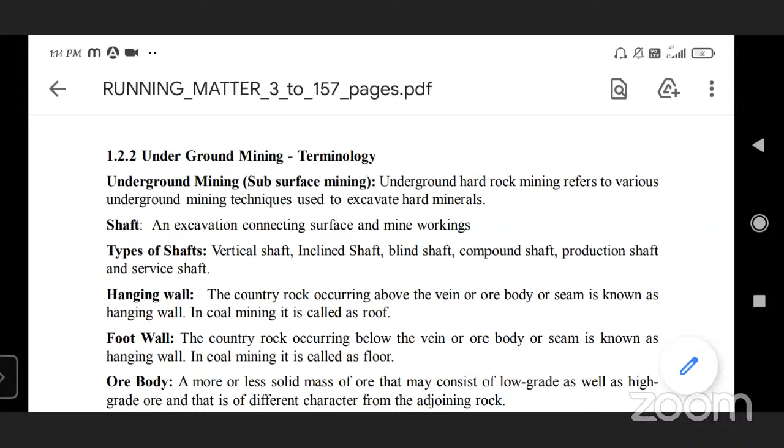Foot wall is vice versa to the hanging wall. The country rock occurring below the vein or ore body or seam is known as foot wall, whereas in coal mining it is called floor. So these are the terms used in coal mines - roof and floor.

The country rock which is above the ore body in coal seams is called the roof. If it is below the ore body, you call it the floor.

An ore body is a more or less solid mass of ore that may consist of low grade as well as high grade material, and is of different character from the adjoining rock. That is called an ore body.

A lode is a mineralized zone.

A mineral deposit is a deposit which is an accumulation of a mineral, usually economic minerals, in an unusually high concentration, a large scale amount of material. When such accumulation takes place, we call it a mineral deposit.

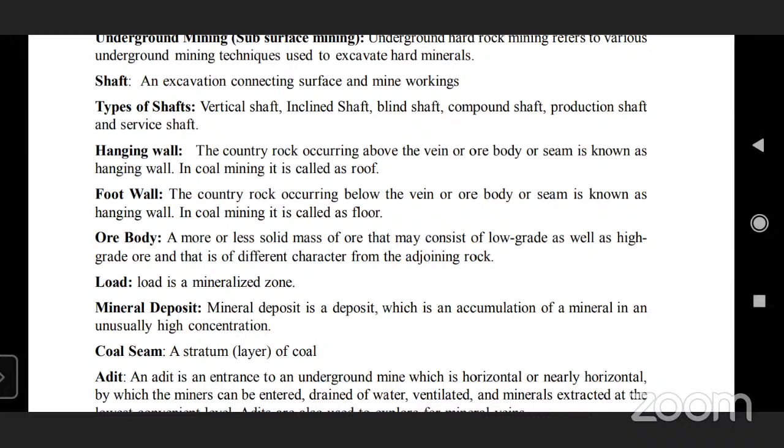An adit is an entrance to an underground mine, which is horizontal or nearly horizontal, by which miners can enter, water can be drained, ventilation provided, and minerals extracted at the lowest convenient level. Adits are also used to explore for mineral veins.

A tunnel is an underground passageway, completely enclosed except for openings for entrance and exit, commonly at each end. Both ends are open to the surface.

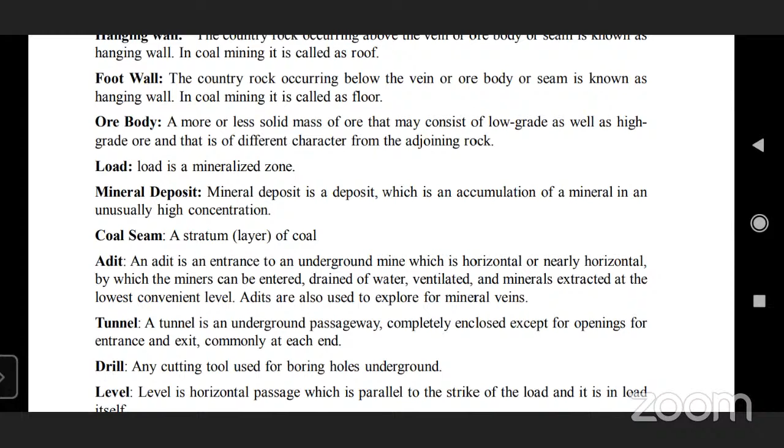A drill is any cutting tool used for boring holes underground. A level is a horizontal passage which is parallel to the strike. There are also foot wall drive, hanging wall drive, stone drift, raise, drive, drift, gallery and winze - all different terminology.

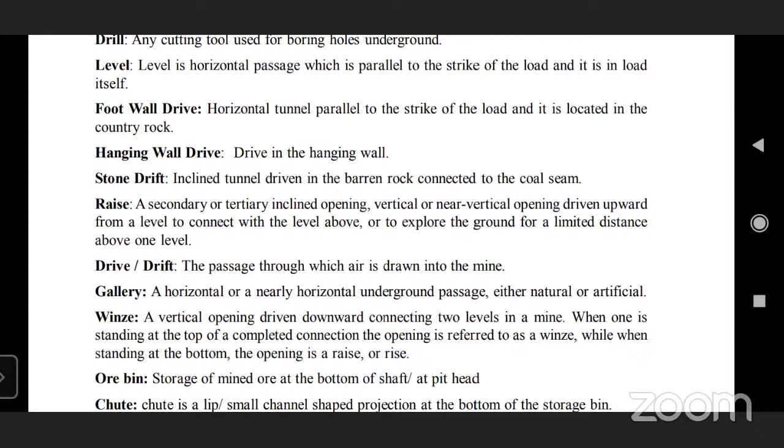A raise is a secondary or tertiary inclined opening. A gallery is a horizontal or nearly horizontal underground passage, either natural or artificial.

An ore bin is a store of mined ore at the bottom of a shaft or pit head.

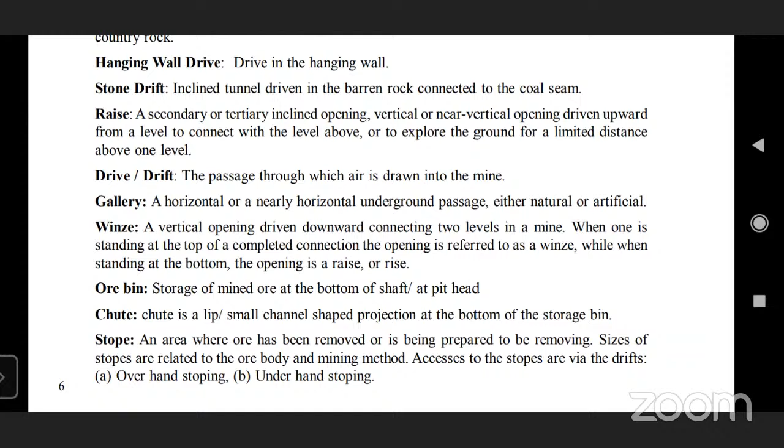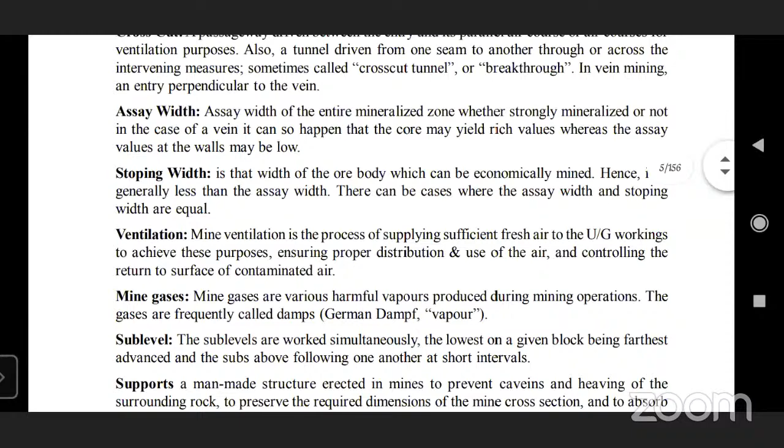A chute is a lip or small channel shaped projection at the bottom of the storage bin. Other terms include cross cut, assay width, stoping width, ventilation, mine gases, sub level and supports - all different terminology used in underground mines.

So these terms - what is a shaft? A shaft is a connection. These are different questions you can see by following the above concepts.

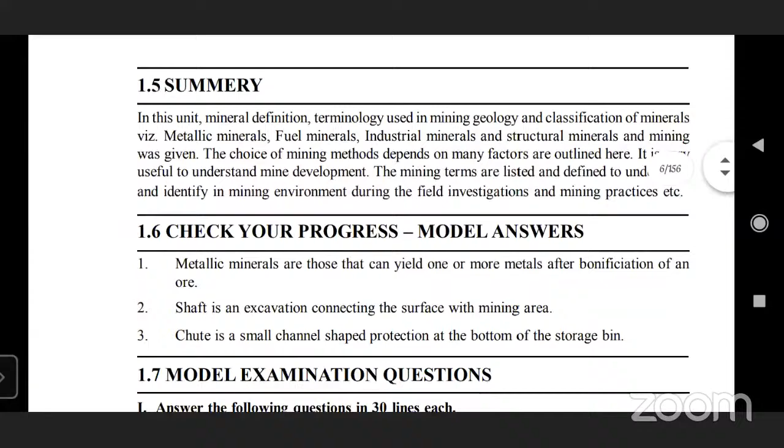Coming to the second part, second unit: methods of breaking the rocks. In this topic we would like to learn the major topics of methods of breaking rocks in the introduction.

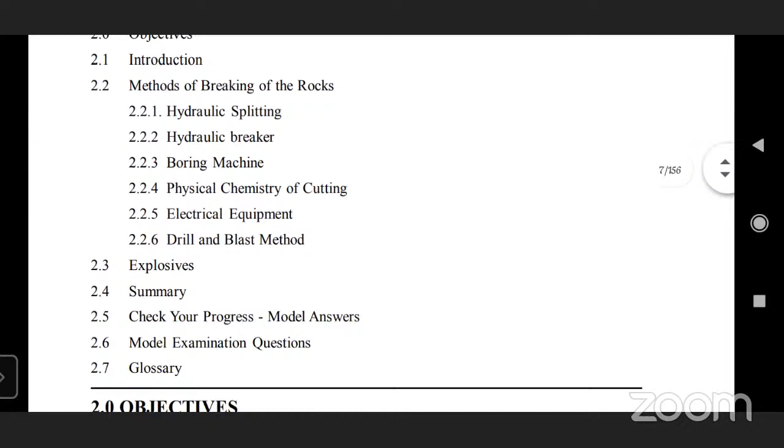These methods of breaking rocks mostly include hydraulic splitting, hydraulic breaker, boring machine, physical chemistry of cutting, electrical equipment, drill and blast methods, and explosives. These are the things we are going to complete in methods of breaking rocks - what type of methods are used to break rocks.

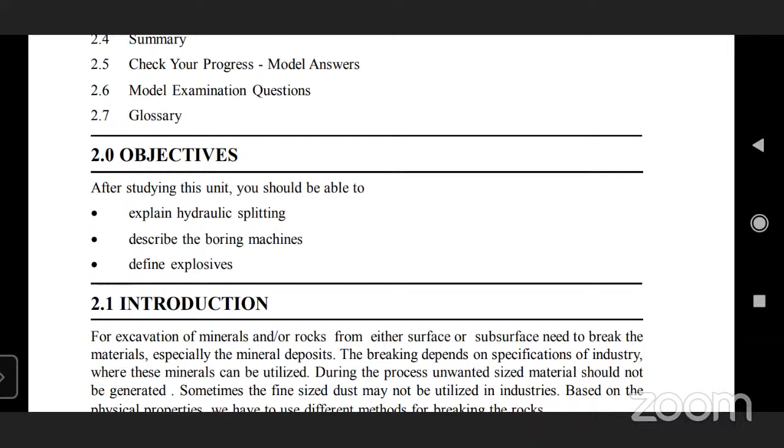The major objective after studying this unit: you should be able to explain hydraulic splitting, describe boring machines, and define explosives.

You can able to answer such type of questions.

Coming to the introduction of methods of breaking rocks. For excavation of minerals and rocks from either surface or subsurface mines, we need to break the materials, especially the mineral deposits. The breaking depends upon specifications of the industry where these minerals can be utilized, and unwanted sized materials should not be generated.

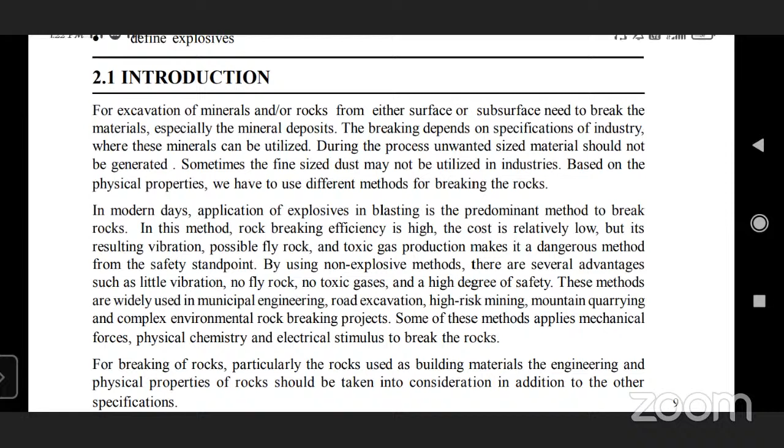Sometimes fine sized dust may not be utilized in industries based on the physical properties, so we have to use different methods for breaking the rocks. There are certain specifications for breaking depending on the industry where these minerals or rocks can be utilized - what minerals, where they can be utilized, the type of industry and what specifications you are going to manufacture - all these are essential before you break down the materials.

Mostly in modern days, application of explosives in blasting is a predominant method to break rocks using modern mining technology. Explosive means blasting apart. So application of explosives in blasting is the most predominant method to break the rocks.

In this method, rock breaking efficiency is high and the cost is relatively low, but its resulting vibration, possible fly rock, and toxic gas production makes it a dangerous method from the safety standpoint.

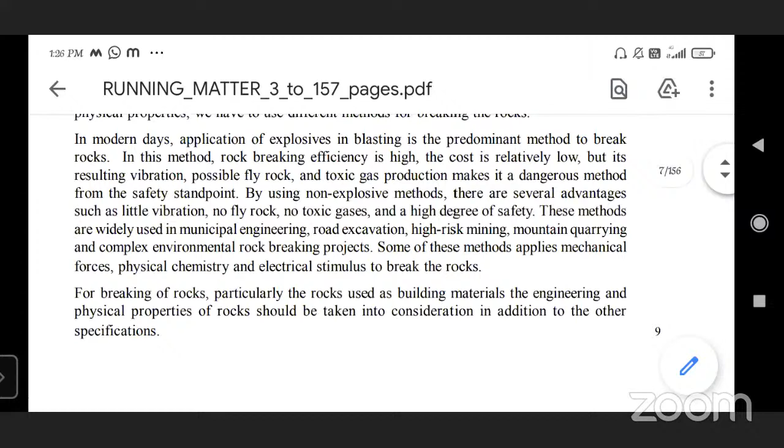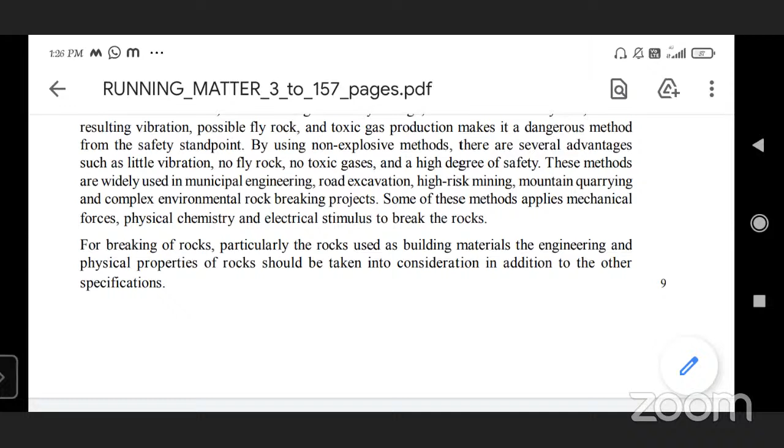For breaking of rocks, particularly in the case of rocks used as building materials, the engineering and physical properties of rocks should be taken into consideration in addition to the other specifications.

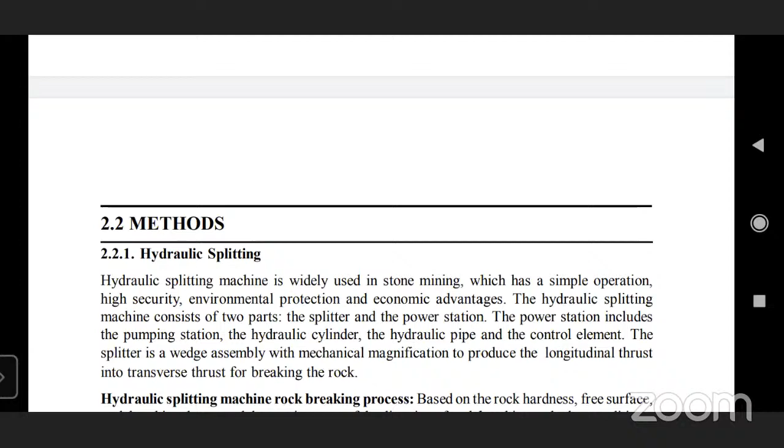So what are the methods of breaking? There are several types of methods for breaking rocks. The first one is hydraulic splitting. The hydraulic splitting machine is widely used in stone mining, which has simple operation, high security, environmental protection, and economic advantages.

The hydraulic machine has majorly two parts: the splitter and the power station. The power station includes the pumping station, the hydraulic cylinder, the hydraulic pipe, and the control elements.

The splitter is a wedge assembly with mechanical magnification to produce longitudinal thrust into transverse thrust for breaking the rock. This is hydraulic splitting, it has a machine, and it is widely used in stone mining mostly. The hydraulic splitting machine rock breaking process is based on the rock hardness, free surface, breaking degree, and the requirements of the direction of rock breaking and other conditions.

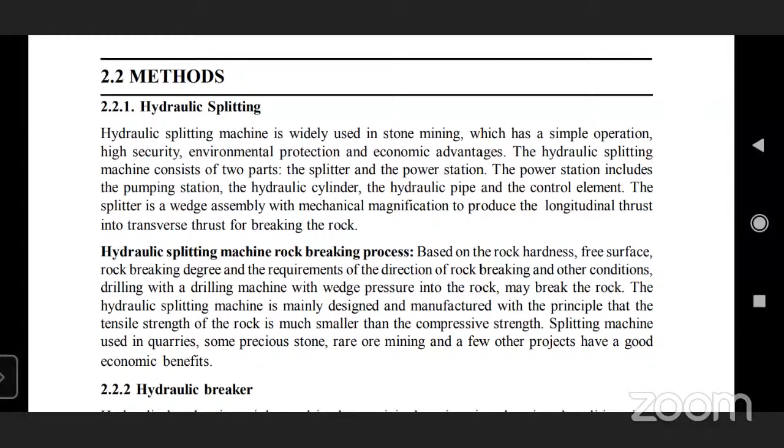There are several types of hydraulic splitting machines, mainly designed and manufactured with the principle that the tensile strength of the rock is much smaller than the compressive strength.

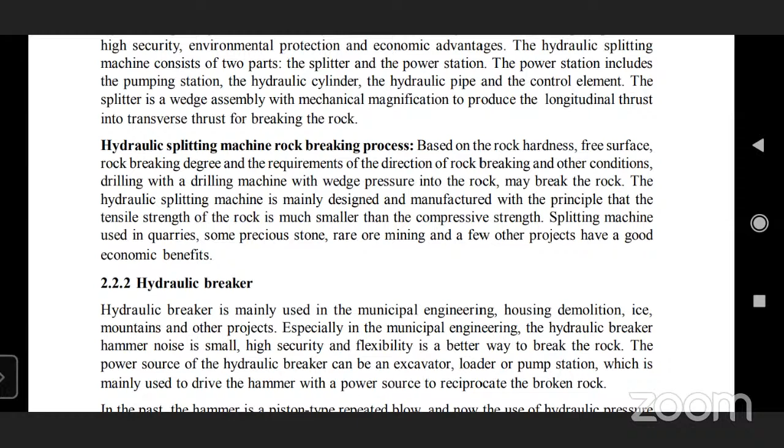A splitting machine used in quarries, some precious stones, rare ore mining, and a few other projects, they are seen very clearly. There are several methods which we are going to see very clearly, whatever the hydraulic splitting machines which are very clearly able to break the rocks by using different types of rock breaking methods.

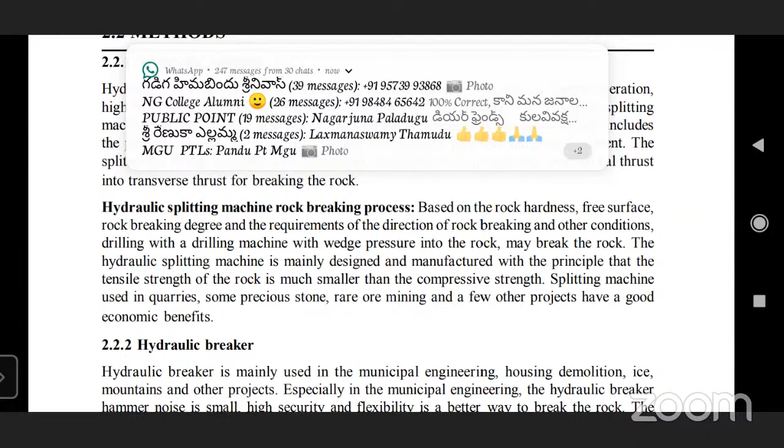These hydraulic machines, mostly using the hydraulic splitting method, work based on the tensile strength of rock being much smaller than the compressive strength. The splitting machine used in quarries, some precious stones, rare ore mining, and a few other projects have good economic benefits. Then, the hydraulic breaker.

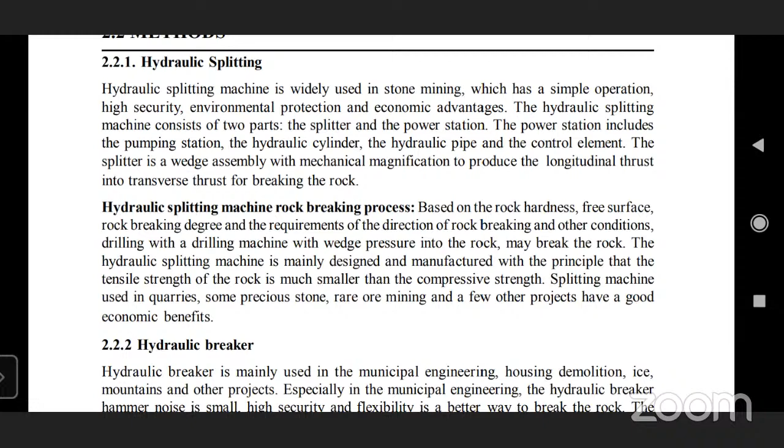The hydraulic breaker is mainly used in municipal engineering and housing demolition, meaning to spoil the constructed house. Most municipal engineering works mostly use this hydraulic breaker to demolish houses.

When householders occupy the road and start construction, the municipality engineers will come and check the distances. If they have occupied the road, they are going to demolish it using the hydraulic breaker with a technician. This is municipal engineering use of the hydraulic breaker - the hammer noise is small, with high security and flexibility, making it a better way to break rock.

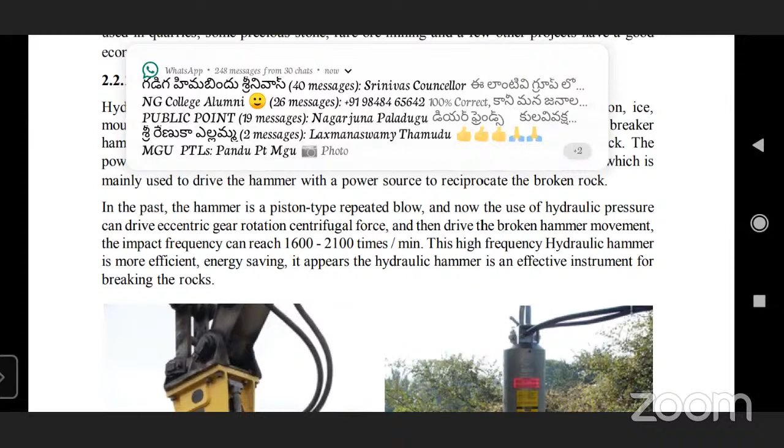The power source of the hydraulic breaker can be an excavator, loader, or pump station, which is mainly used to drive a hammer with a power source to reciprocate and break the rock. These are the different ways which are used to break down rocks.

In the past, the hammer was a piston type with repeated blows. As you know, when drilling a bore well, you can see the hammer at the end of the rod or the beginning of the rod - the hammer is attached to the rods, and it can work while rotating.

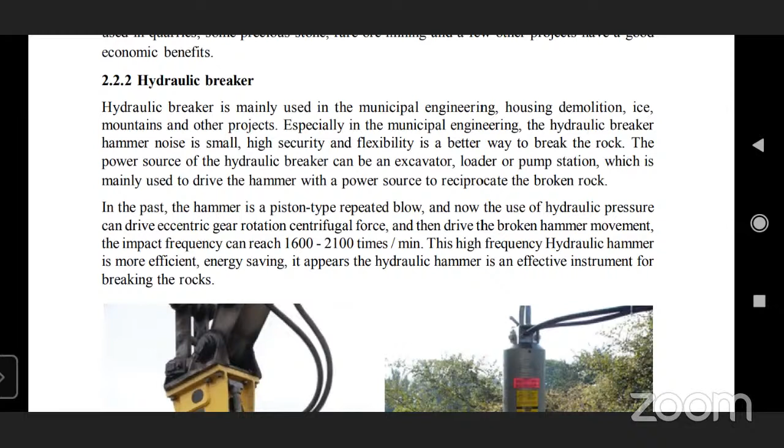With a piston type repeated blow, the use of hydraulic pressure can drive eccentric gear rotation centrifugal force, then drive the broken hammer movement. The impact frequency can reach up to 1600 to 2100 times per minute. This high frequency hydraulic hammer is more efficient and energy saving. It appears the hydraulic hammer is an effective instrument for breaking rocks.

I will show this - this is the hydraulic breaker. This is a very good diagram. These diagrams are showing the hydraulic breaker, how we are going to break the rocks by using it.

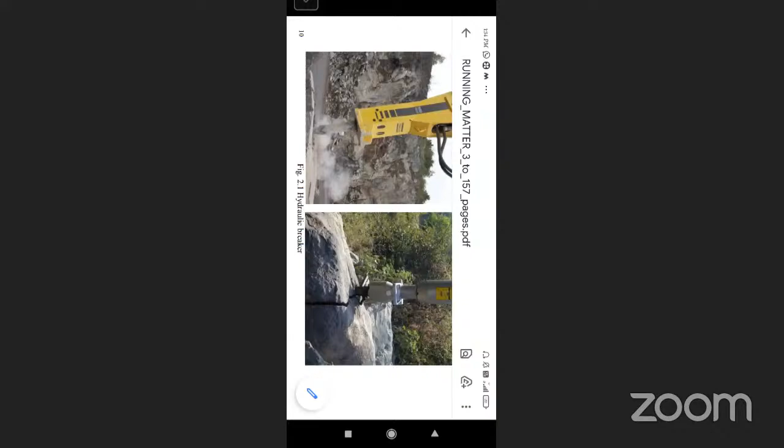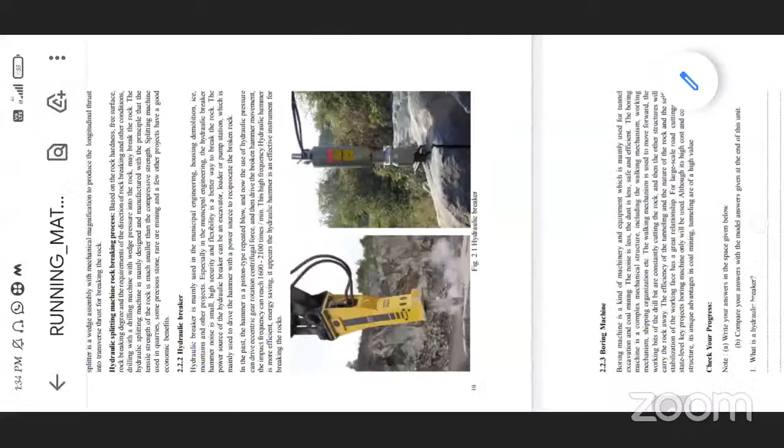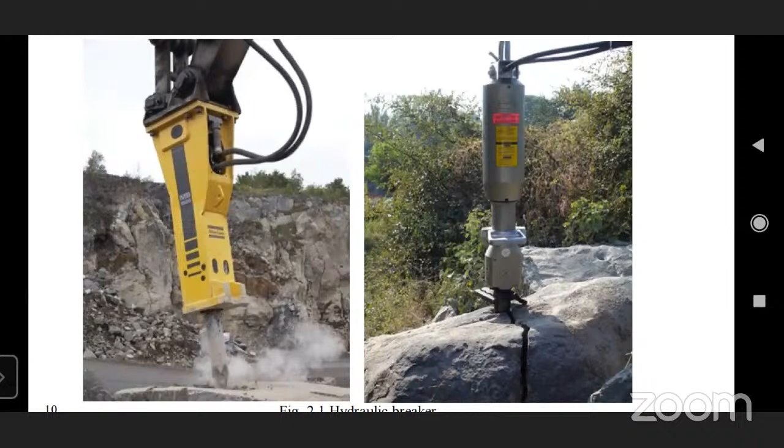So these are the different types of methods if you are going to break the rock. Here we can see, by using the hydraulic breaker method, we can break the rocks. So this is the hydraulic breaker - by making a hole to make it into individual parts according to requirement or needs, so we can break the rock by the pressure.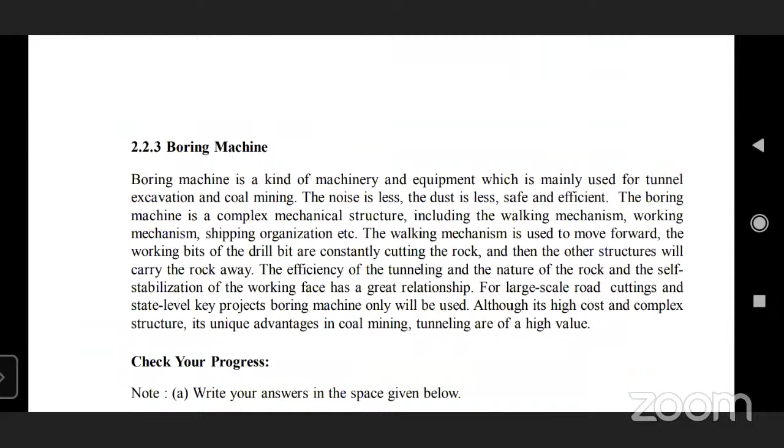Next, boring machine. Boring machine is a kind of machinery and equipment which is mainly used for tunnel excavation and coal mining. If you want to construct a tunnel, then you are going to use the boring machine. Tunnel excavation and coal mining uses bore machines.

For this machine, the noise is less as well as the dust is also less. Safe and efficient, the boring machines.

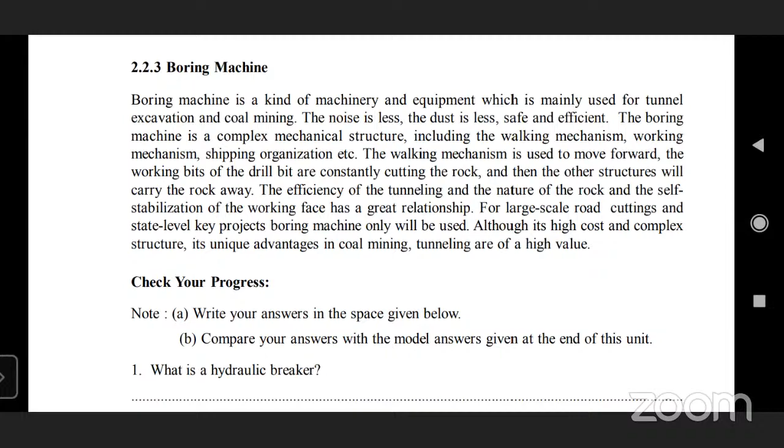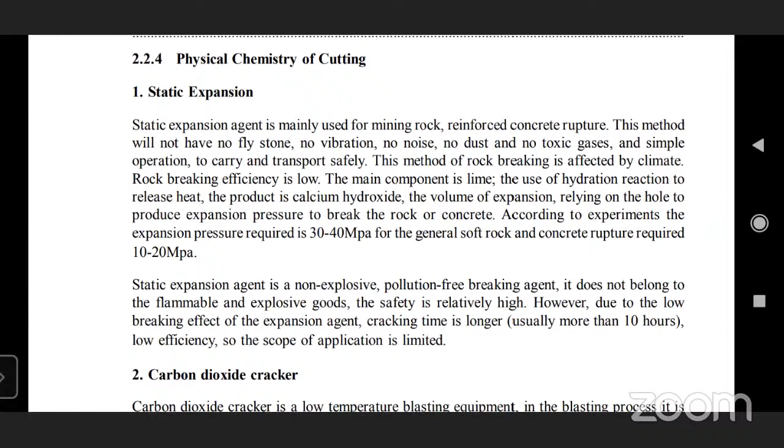So what is the hydraulic breaker and the physical chemistry of cutting and the static expansion? I will see the static expansion of the physical chemistry of cutting. So static expansion agent is mainly used for mining rock and reinforced concrete rupture.

This method will not have no fly stone, no vibration, no noise. Rock breaking is affected by climate - in cold climate, rock breaking efficiency is low.

So the main component is lime. The use is the hydration reaction to release the heat, producing calcium hydroxide and the volume expansion of lime.

As we know, the materials are portable or it may be heavy to transport from one place to another, or one mine site to another mine site. So their expansion, relying on the hole, produces expansion pressure to break the rock or concrete.

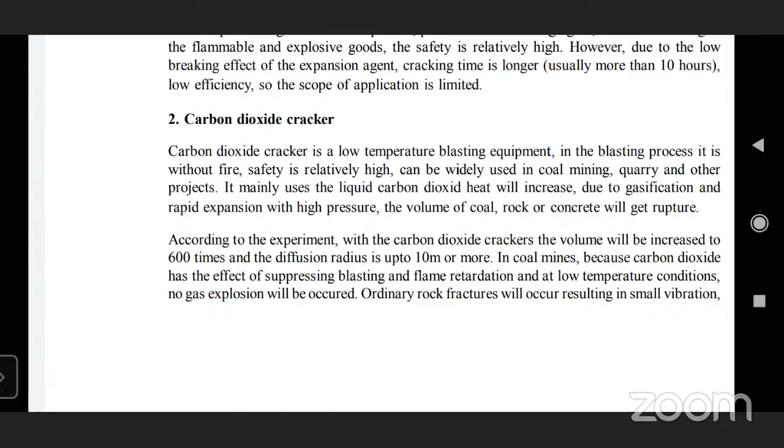So as we know, this is each and every machine and how it is functioning - those things we'd like to learn in a broad way.

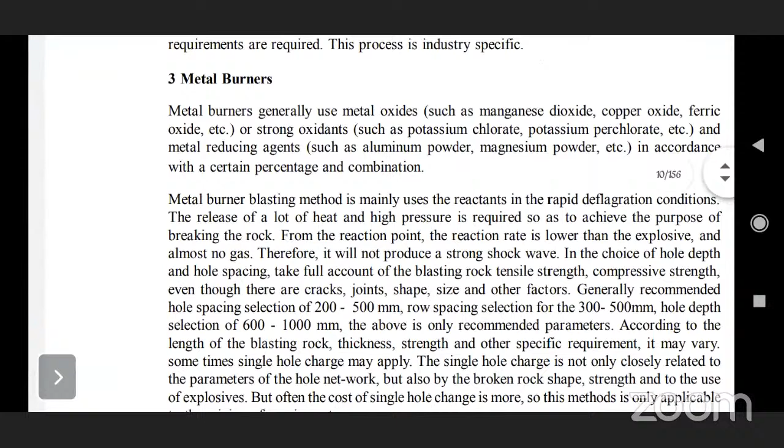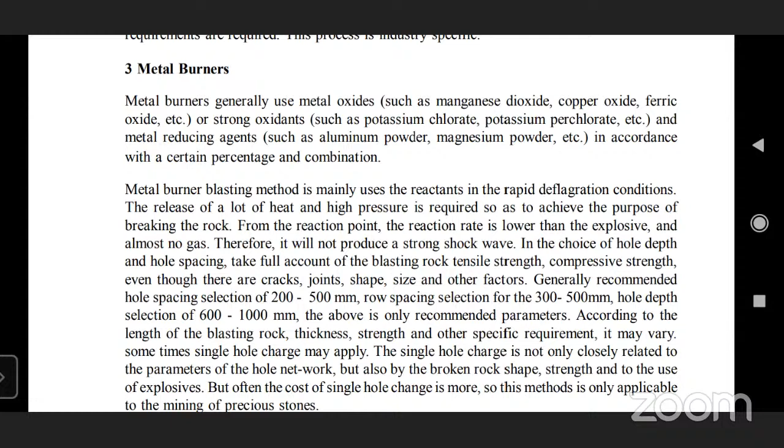Then coming to metal burners. As we know, the metal burners generally use metal oxides such as manganese dioxide, copper oxide, ferric oxide, etc., strong oxidants such as potassium chlorate, and metal reducing agents such as aluminum powder and magnesium powder, etc., in accordance with a certain percentage and combination. The metal burner blasting method mainly uses the reactants in rapid deflagration conditions.

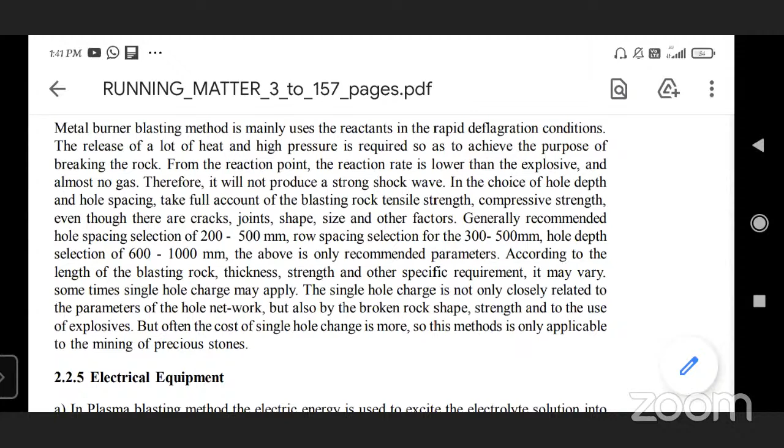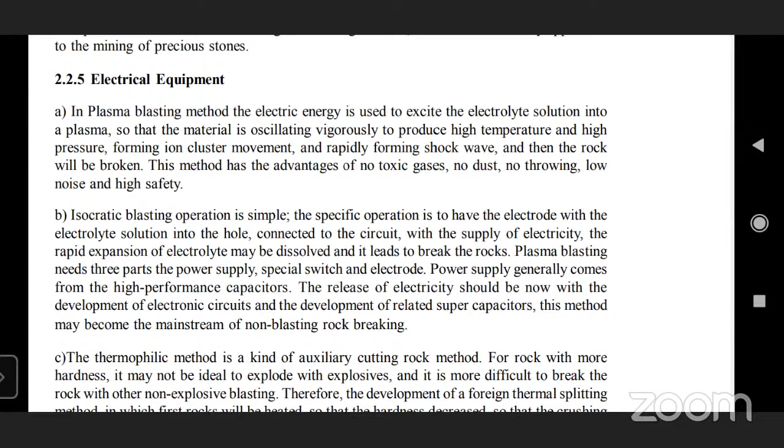Then isocratic blasting - operations are simple, specific operations which are mostly useful for various industries.

Then the drill and blast method. As we know, the drill and blast method is the most used method for excavation throughout the world. This method can be used in all types of rocks and the initial cost.

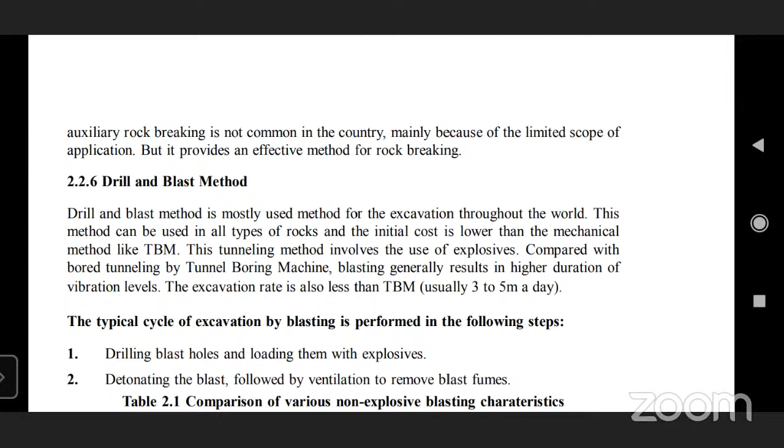This is the most excavation method used throughout the world. This method can be used in all types of rocks and the initial cost is lower than mechanical methods like TBM. This tunneling method involves the use of explosives.

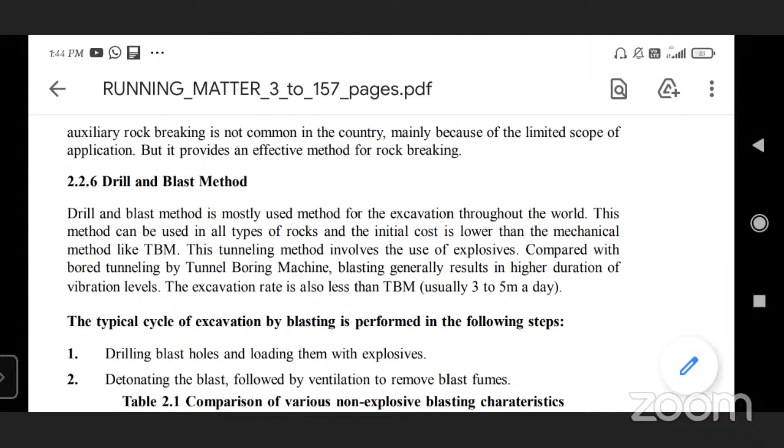The typical cycle of excavation by blasting is performed in the following steps: drilling blast holes and loading them with explosives, detonating the blast, followed by ventilation to remove the fumes.

This diagram, Table 2.1, is showing a comparison of various non-explosive blasting operations and characteristics.

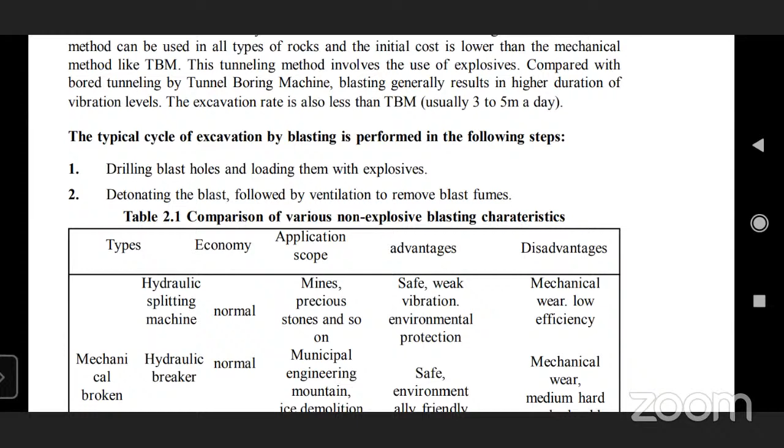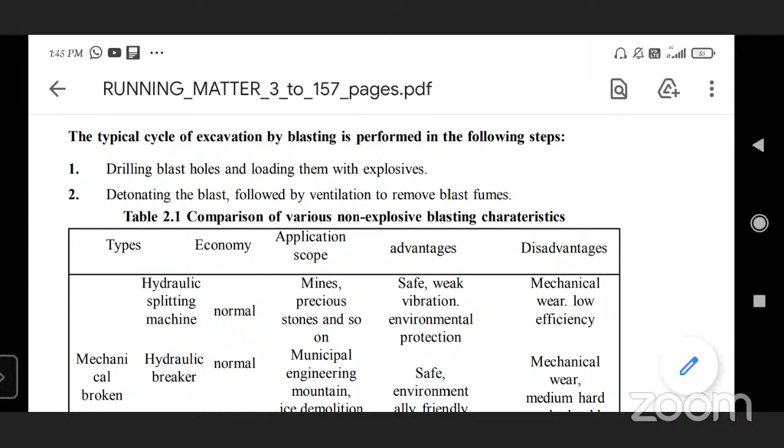Here the types are hydraulic methods, and hydraulic methods are mostly mechanical breaking. The table clearly shows types, economy zones, application scope, and advantages.

In the mechanical breaking process, the hydraulic splitting machine economy zone is normal, the hydraulic breaker economy zone is normal, and the boring machine is higher.

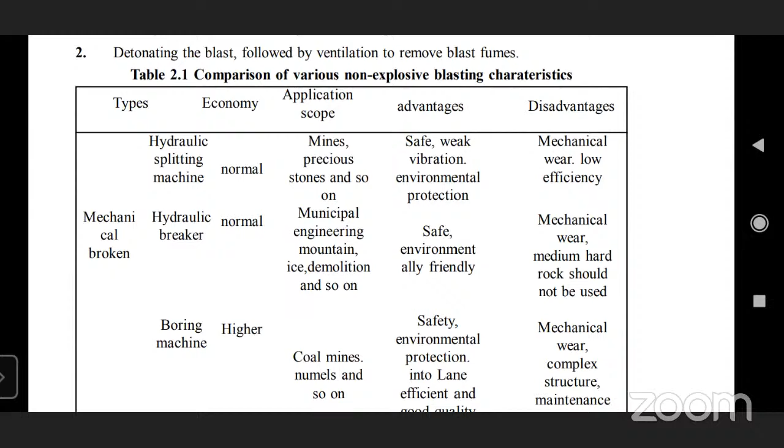These are the different types and kinds of materials which are present below the earth's crust.

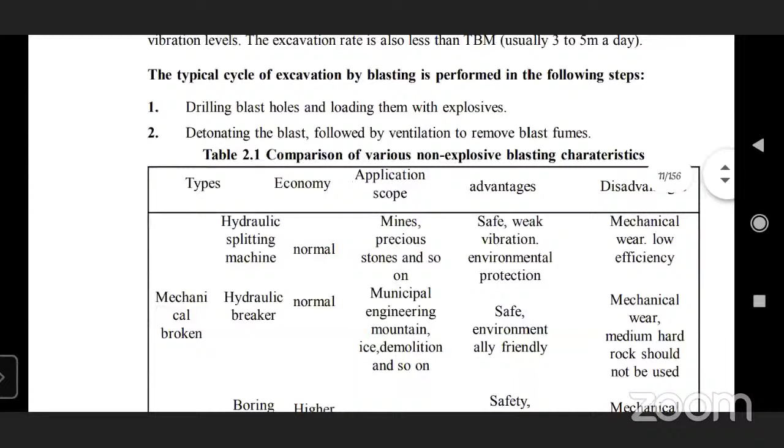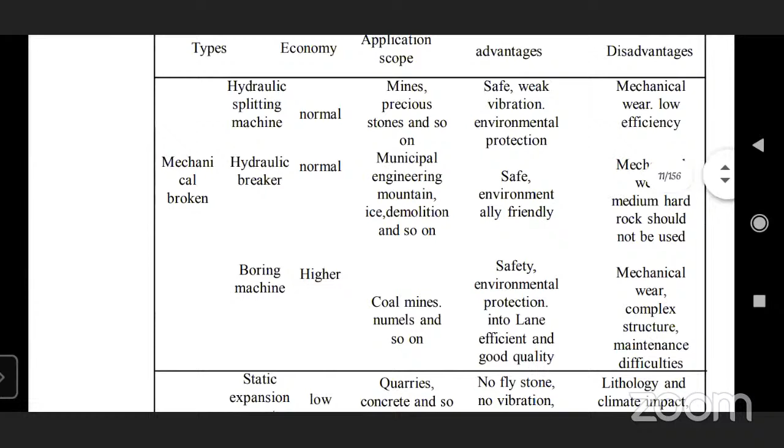The typical cycle of excavation by blasting is performed in the following steps: drilling blasting holes and loading them with explosives, then removal of the blasted rock.

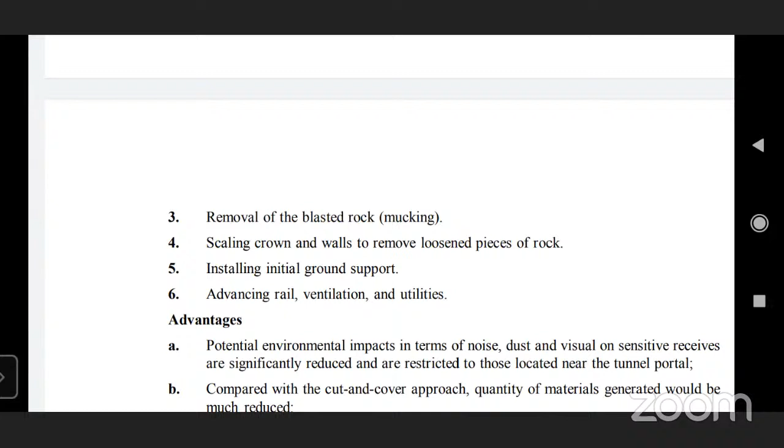So how are we going to operate these mining machines using this equipment? This involves removal of the blasted rock, scaling the crown and walls to remove loosened pieces of rock, installing initial ground support, and advancing rail, ventilation and utilities.

So what are the major advantages by knowing these things? The potential environmental impacts in terms of noise, dust, and visual sensitive receptors are important considerations.

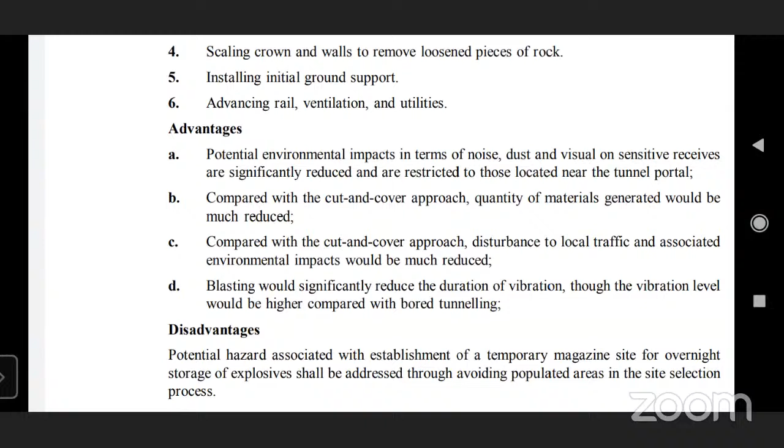These possibilities are quite similar in terms of the mining method advantages. Compared with the cut and cover approach, disturbances to local traffic and associated environmental impacts will be much reduced.

Blasting would significantly reduce the duration of vibration, though the vibration level would be higher compared with bored tunneling.

What are the disadvantages of these activities? A potential hazard associated with the establishment of a temporary magazine site for overnight storage of explosives shall be addressed through avoiding populated areas in the site selection process.

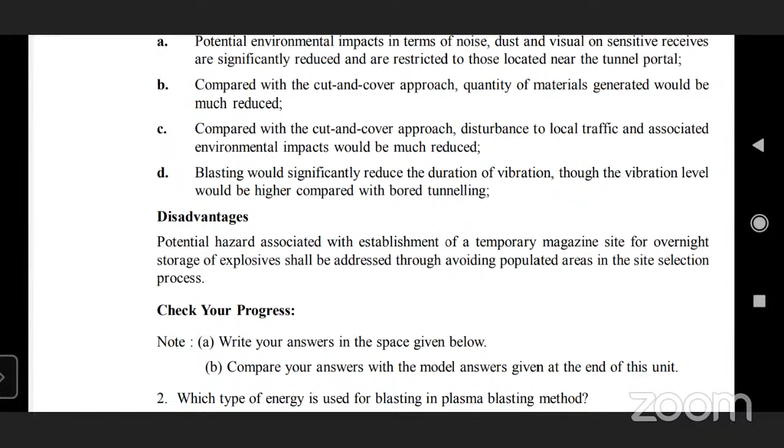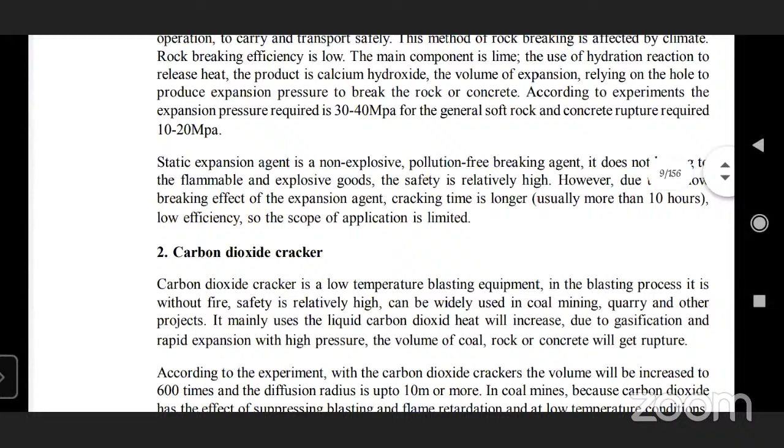These are the various methods of breaking rocks. Mostly we have a few types of breaking methods. The first is the hydraulic splitting method, and also hydraulic breaker and boring machine, and physical chemistry cutting methods.

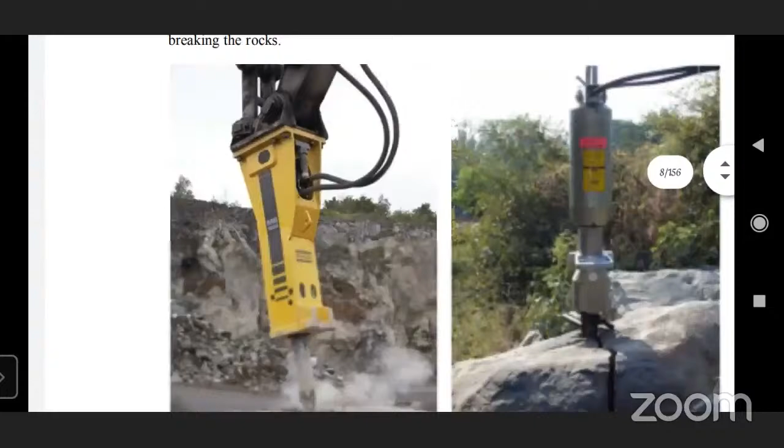So these are the three major types: hydraulic splitting, hydraulic breaker, and boring machine. These are the major methods for blasting in the mine area to excavate materials from the earth's crust.

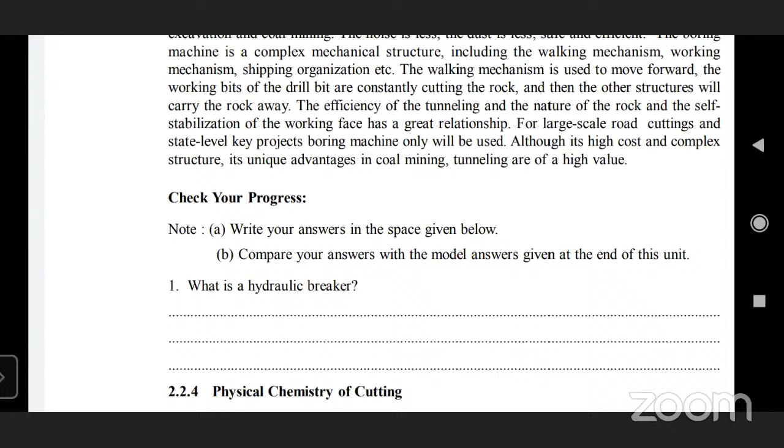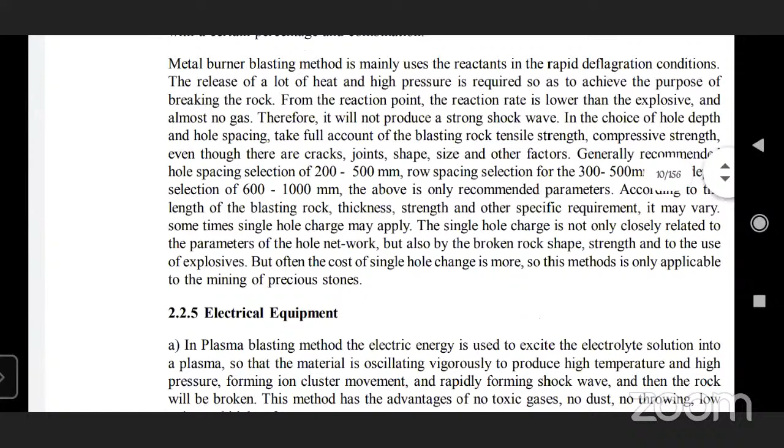Physical chemistry cutting includes static expansion, carbon dioxide cracker, metal burners, and electrical equipment. These drill and blast methods are the physical parameters here.

These are the major advantages and disadvantages. Explosives are the substances or materials which detonate to produce a high intensity shock wave and large volumes of gas, which being confined in a hole, expand rapidly, entering existing minor cracks in the rocks.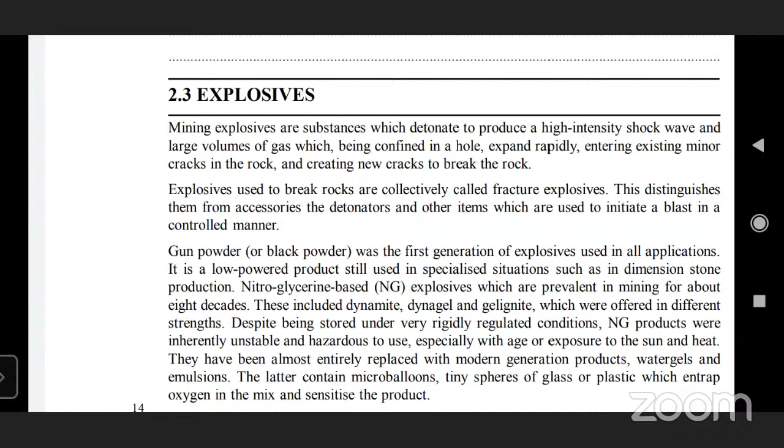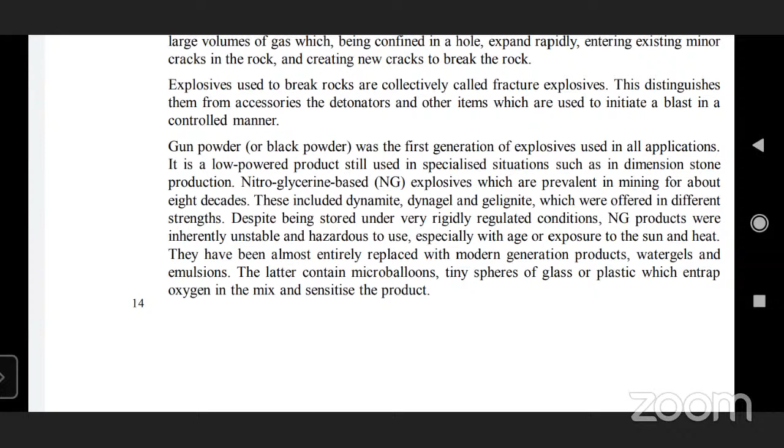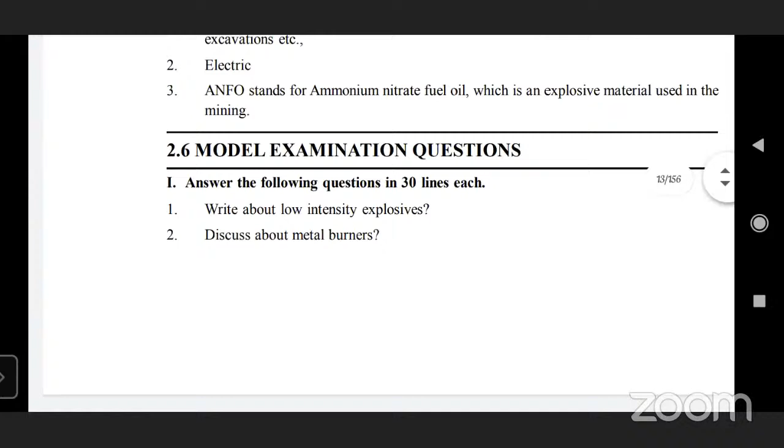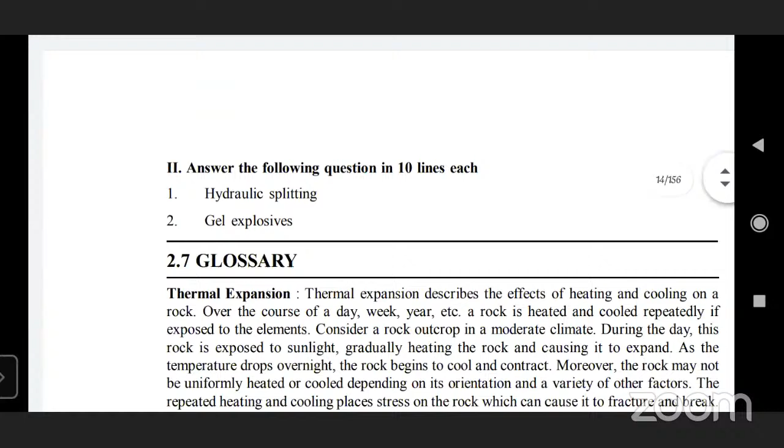Model examination questions will come like this: write about low intensity explosives, discuss metal burners, how metal burners work, and what is hydraulic splitting and gel explosives, which mostly come under this topic.

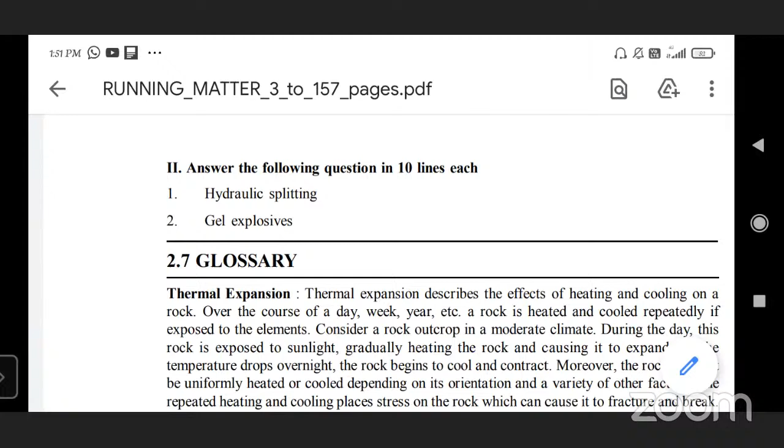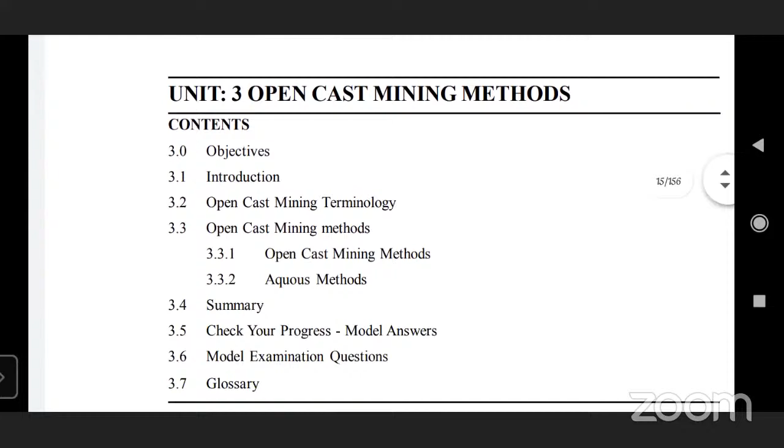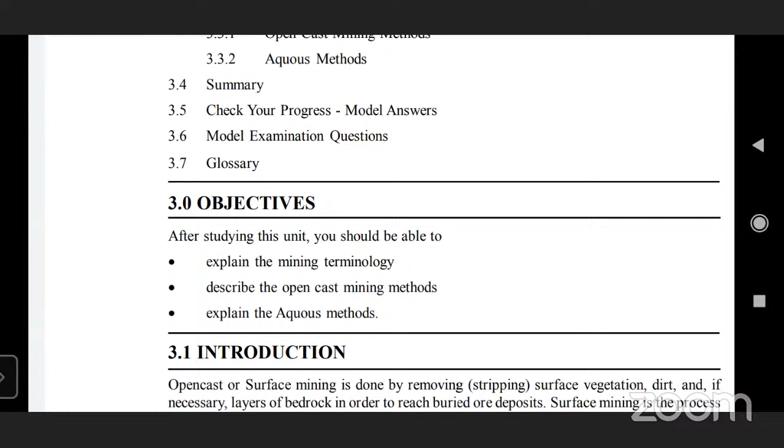Then coming to open cast mining methods. The open cast mining methods are mostly used for this. After studying this unit, you should be able to explain the mining terminology, describe the open cast mining methods, and explain the aqueous methods.

Open cast mining, or surface mining, or open pit mining, is done by removing surface vegetation, dirt, and if necessary layers of bedrock in order to reach buried ore deposits. Surface mining is a process of extraction of minerals by removal of overburden, the rock or waste material lying on the mineral or ore body to be mined. Surface mining is also known as open pit mine, open cast mine, or strip mining; all are similar.

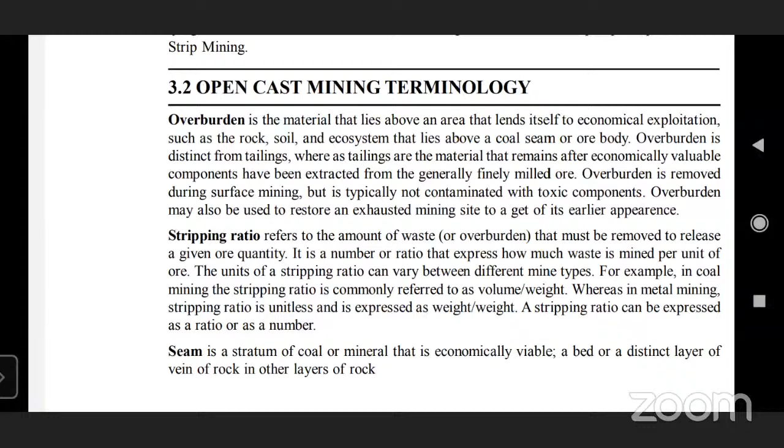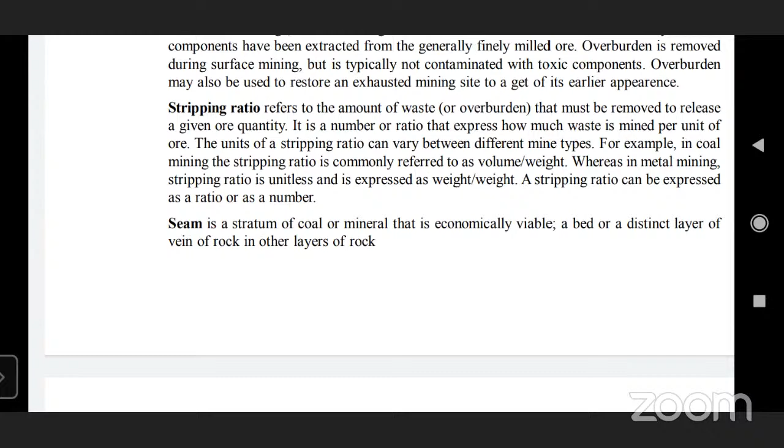In open cast mining terminology, overburden is the material which lies over the ore body. The stripping ratio refers to the amount of waste or overburden that must be removed to release a given quantity of ore. A seam is a stratum or layer of coal, mineral, or rock that is economically viable — a bed or distinct layer or vein of rock among other layers of rock.

Placer mineral deposits, for example heavy mineral placer deposits, are defined as alluvial or elluvial placer deposits, depending on the method used for transportation of river materials, deposited usually at points along the floodplain of a river or alluvial area. Elluvial deposits are material still at or near the point of its formation, and colluvial minerals include gold, tin, and platinum, etc. Placer deposits can also be defined as mineral deposits formed by the process of mechanical concentration of mineral particles from weathered debris.

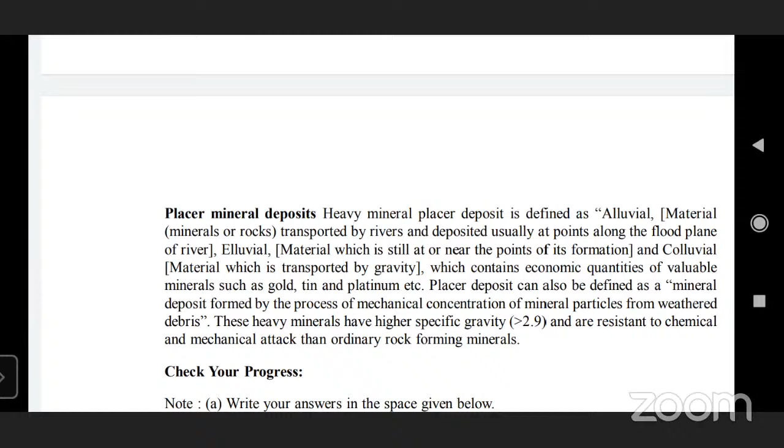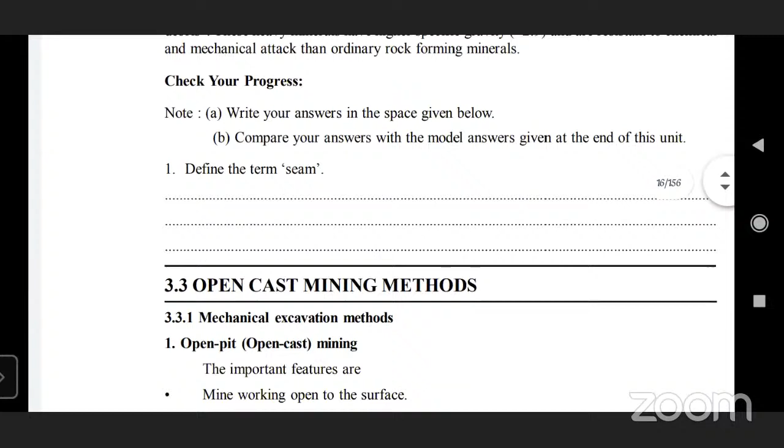So placer deposits are formed by mechanical concentration or mechanical separation. Mechanical concentration depends on the criteria of natural gravity separation of heavy minerals from light minerals. So these are the open cast mining methods, mechanical excavation methods, and open pit mining methods, which can be clearly seen in open cast mines.

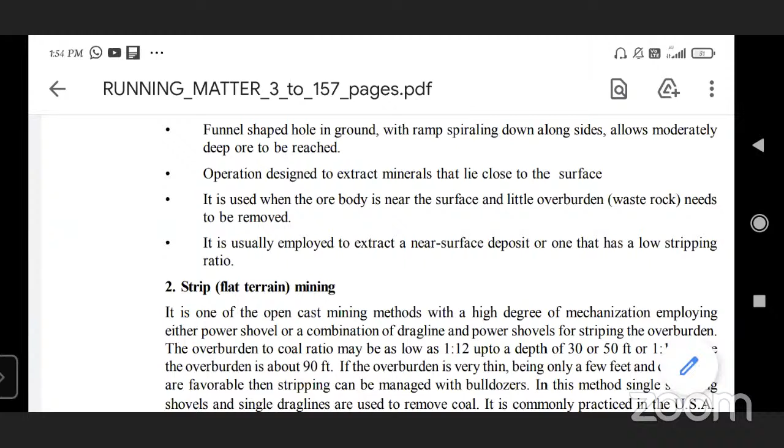In open cast mines, there are several types of technology used in all aspects, where different techniques are applied for excavation of material from open cast mines or surface mines, which are very near to the earth's surface.

In this, the extraction of economic or valuable material from the earth's crust happens by removing the overburden. We need to first remove the overburden to start the mine or to extract the material. So when we remove the overburden, the waste material which lies above the ore body, we then enter into the ore body. Then blasting methods and explosive methods are used to extract that ore body from the open cast mine.

Yes, this is open cast mining methods. My class is over. Thank you.